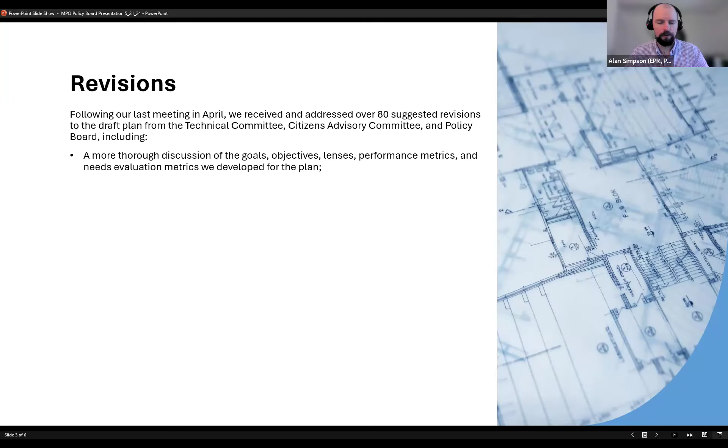I won't go through every single one, but we included a more thorough discussion of the goals, objectives, lenses, the performance metrics, and the needs evaluation metrics we developed for the plan. We made some minor revisions to the constrained and vision lists for improved readability and organization, and we added a few projects to the vision list at the request of Albemarle County staff.

On page 58 of the version in your packets, there was an error in the thresholds for the high, medium, and low need scores. The method we used was a 7-point scale, but the highest score we had in the process was 5.07. So we simplified the scale into 3 categories: high, medium, and low — high being scores from 3 to 5.07, medium being scores from 2 to 2.9, and low being scores from 0 to 1.9. The version you all have in your packet still had the information about the 7-point scale, so that sentence was inaccurate. I had forgotten we'd changed it at some point in the process, so my apologies there, but the language now in the plan is the scale we actually used throughout the process.

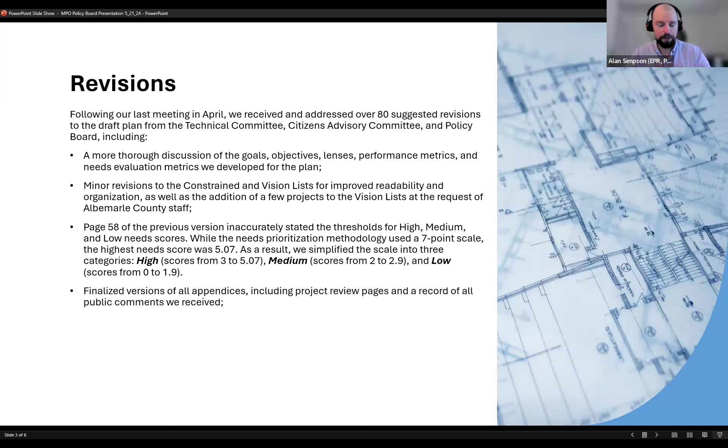We have finalized versions of all the appendices, so we included project review pages for each project — that includes vicinity maps, detailed descriptions of each project, and the breakdown of the needs prioritization score for each project. That's a complement to the constrained list, excuse me, and we have a record of all the public comments we received.

We revised all the maps in the document, so there's new high resolution versions of every single map. I changed the base map to make it easier to read. Most of the symbology was changed just to make it easier to look at, and you can zoom in now and see things in detail.

The previous version had some lower resolution maps, so those should be easier to see now. In most cases, I also included a zoomed in map of Charlottesville, so you can look more closely in detail at conditions in the city. Those are complements to the MPO maps.

High res versions of all the charts and graphs as well, those were all redone for this version. Some updates to the acknowledgement section and some minor grammar and style edits throughout the document. So all told, about 80 revisions to the maps and the content of the document.

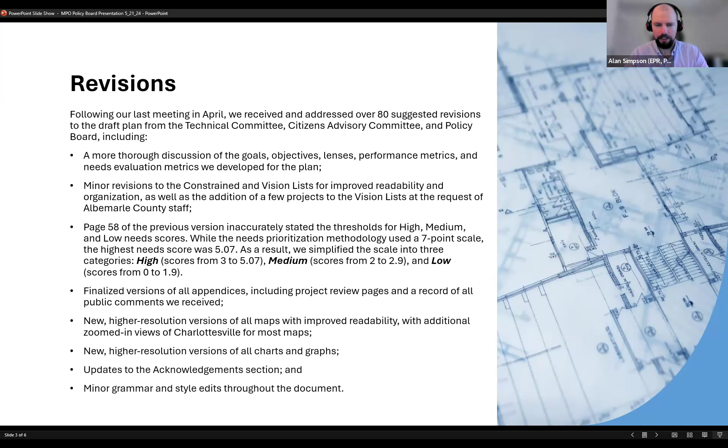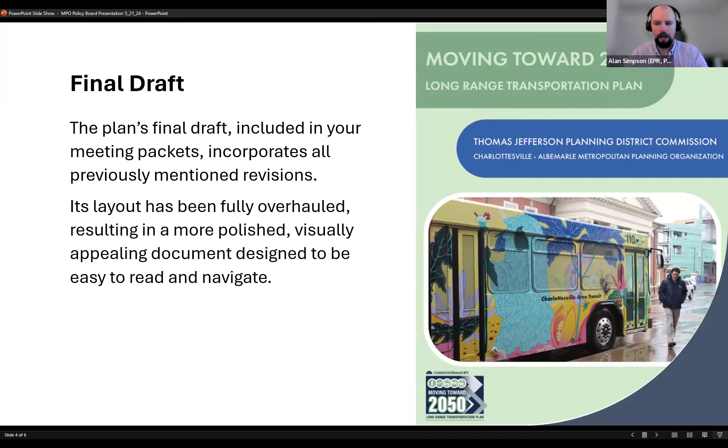The final draft, which you have in your packets, incorporates all those previously mentioned revisions. The layout's been fully overhauled. The previous version was just a Word document, and now it's a more polished, hopefully visually appealing document. It should be easier to read and navigate.

Next steps: the MPO may decide to revise the plan at any time. While it must be adopted this month, there are future opportunities to tweak the document if necessary. Thanks again for all your valuable feedback, your guidance and support throughout this process. You all helped make this a much better plan than the version I sent you last month. We really appreciate it, so if there are any questions, happy to answer those.

I can add that the MPO Tech Committee did recommend that you all adopt the plan as presented. I would imagine, well, I don't imagine, I know, that if Hydraulic comes back and there starts to be traction on doing a major piece, if there's an element not included here, we can revise the plan to include it.

Yes, revisions can be made. All right, if there are no questions, is there a motion to adopt the Moving Toward 2050 long range transportation plan, with the one revision as noted in the change of the scaled score?

I would move the resolution that's in the packet adopting the MPO's 2050 long range transportation plan, Moving Toward 2050, with the asterisk, I guess, of the one revision that Mr. Simpson shared, with the scaled score. It's just an edit that wasn't in the final draft.

The needs we're trying to address with improvements at this location include high crash volumes both on 5th Street and on the eastbound ramp coming off of 64 heading onto 5th Street. There are multiple VTrans needs related to safety, both general safety and pedestrian and bicycle safety, transit connections, and congestion mitigation. Our goals are to address interchange operations and safety, as well as enhance multimodal accessibility.

We've undergone a more recent public engagement process to get feedback on the preferred alternative at this location. This improvement was initially identified as part of a 5th Street corridor study completed a couple years ago with substantive stakeholder engagement, where the DDI was tentatively identified as the preferred solution for this area. This current work is an addendum to that initial study to confirm it would be the preferred solution in developing the application.

This first slide shows the location of crashes and the types of crashes currently being experienced at the interchange. There are a number of rear-end crashes occurring on the eastbound ramp, as well as between the on and off ramps along 5th Street.

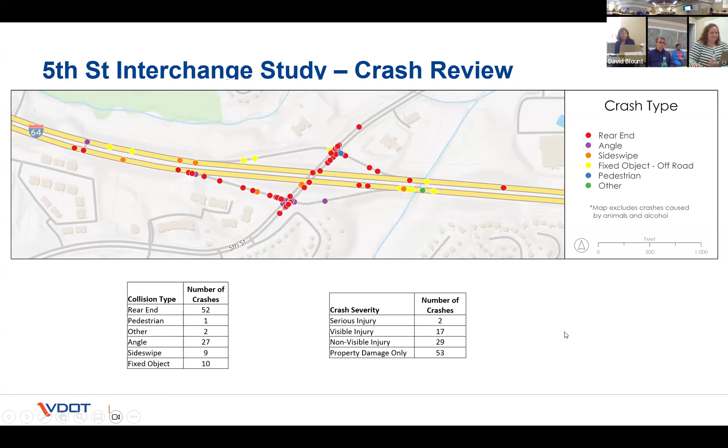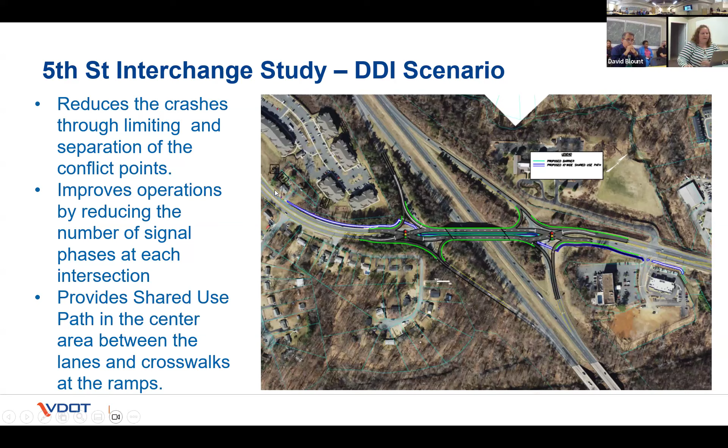And then the crossing would be on the southwest side, also at a signalized crossing. The shared use path would continue to this first driveway area where there's an existing sidewalk. So that was the first alternative that the public was asked to weigh in on.

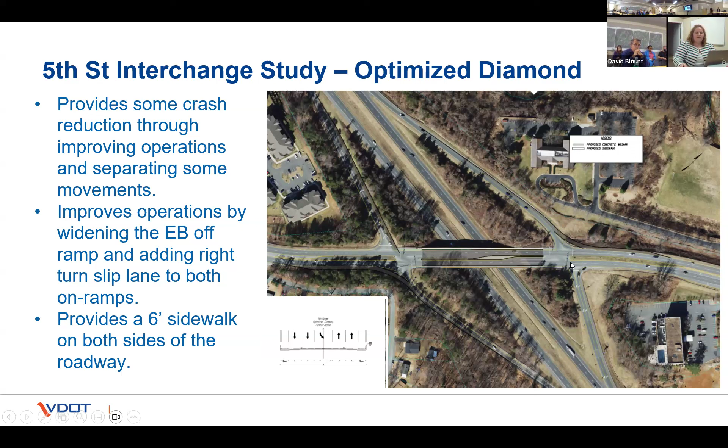The second alternative is an optimized diamond, which would look a lot like what's there right now. The addition would be a right turn slip from 5th Street onto 64 in both directions, an additional eastbound left turn lane, and sidewalks on both sides of the bridge.

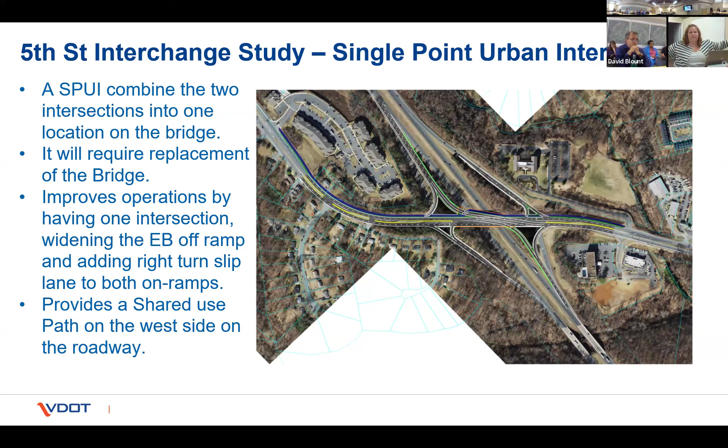The single point urban interchange would basically have a centralized traffic control signal at the midpoint of the intersection that would control the directional movement of all of these, and would provide a shared use path on the west side of the street. The challenge with the single point urban interchange is that you would need a much wider bridge, so if you go back to that first chart, it shows this being very expensive because you would have to rebuild the bridge to accommodate it.

And then the last alternative that was considered is basically the existing diamond as it is now, with the improvement being a sidewalk on the opposite side of the bridge.

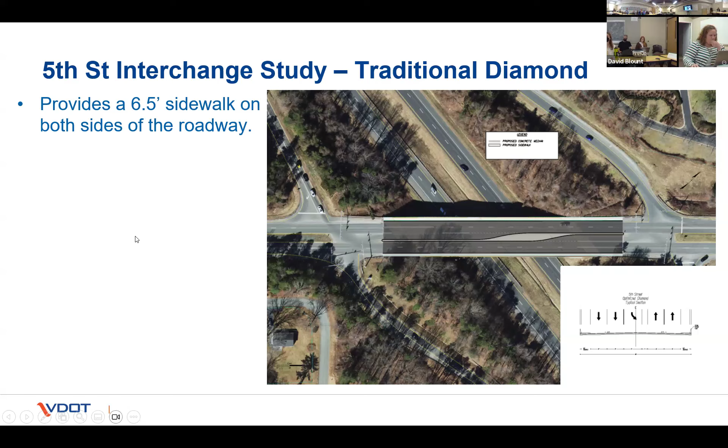So we put this out for public comment and got the comments back on Friday. We did try to do some analysis on the survey responses, but it's pretty limited at this point. Out of all of the alternatives, we had 967 survey respondents overall, and on average, the highest score was for the diverging diamond.

Just curious, is that a lot of respondents for the studies we have, or is that average or low? I would say this seems pretty high. I think we've seen an uptick in the number of responses recently, higher response rates on some of these surveys, but I think we can feel like this has been a well-publicized effort to get people to take the survey.

So there were 967 total survey participants. Of those, 868 provided a score for the diverging diamond interchange, and of those 868, 286 respondents provided comments. So we wanted to understand what kind of comments people had on the DDI in order to understand what the concerns were. But I want to make sure I'm framing this appropriately to say that a very small number of folks who scored the DDI made comments, so the comments are not necessarily reflective of general opinion.

So with all of that said, it seems like there's still public support, as well as the initial assessment looking at the crash modification factors, operational improvements, and cost overall, which would still support the DDI as the preferred alternative for this search. So any questions on this?

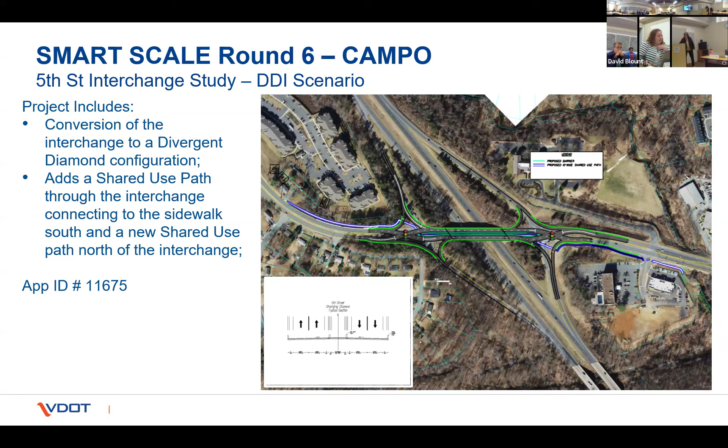Okay, thanks. That was fun.

Just as a reminder for Pantops, it includes the at-grade crossings at Rolkin Road and 250 of Pantops. There would be bicycle or pedestrian crossings on 3 legs of this intersection. It would include a modification of the signal there, and a sidewalk between Rolkin Road and...

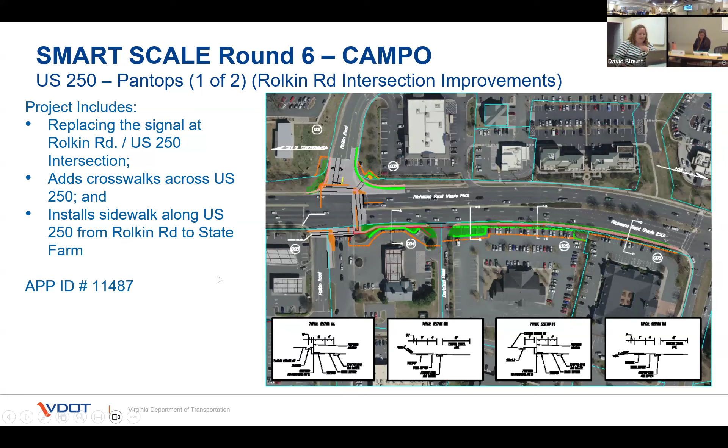It's about 500 feet from the intersection right here, and then a State Farm. And then the next part of this is just a little bit further east.

There would be the median crossing at the hotel, and then an extension of the installation of a left turn lane going from Peter Jefferson Parkway, or going from 250 onto Glenorchy Drive. And then there would be a through cut onto Peter Jefferson Parkway, which would allow traffic coming from Peter Jefferson Parkway to turn right or left, but not go through the intersection straight.

And then there would also be this 50 vehicle park and ride lot with a bus loop, where buses would be able to come to here, drop off or pick up passengers, and then continue through.

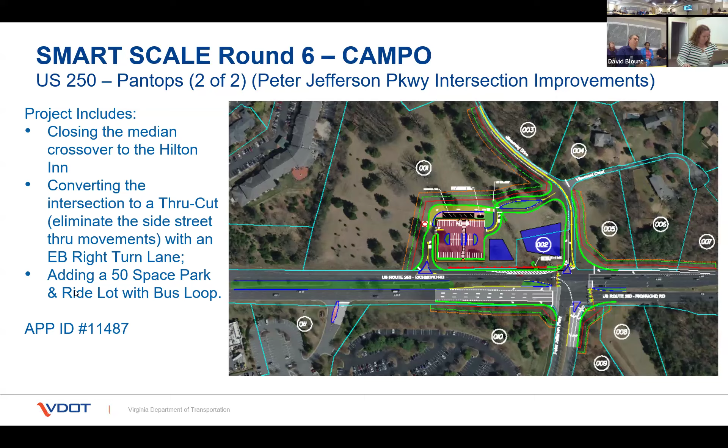There would be some access management improvements, so closing the crossovers, the median crossovers, throughout along the corridor on Barracks Road between Georgetown Road and the interchanges.

There would be concrete pads for 2 transit facilities or transit stops, one at Surrey Road and one on Georgetown Road. The concrete pad at Georgetown Road would be able to accommodate a transit shelter that would be installed separately as part of this application, but it would be designed to accommodate that.

And then there would be a shared use path that is being planned along the west side of Barracks Road through the entire length of the corridor.

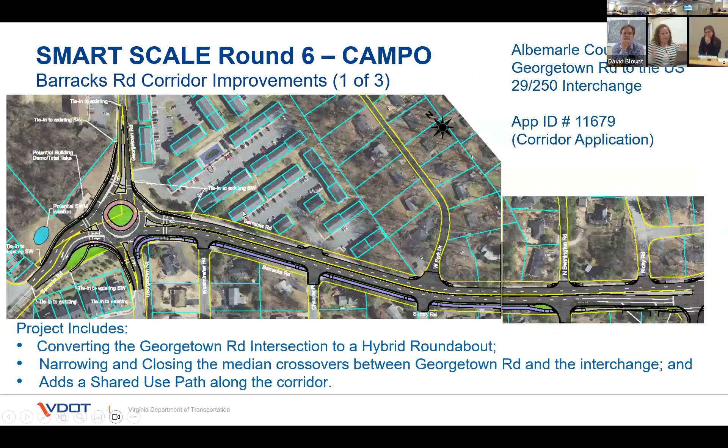And just as a reminder, the first application for the MPO would be for the full corridor, and the second application for the MPO would be basically from the interchange south into the city.

Any questions? Questions? Okay, I think that's it for the Barracks Road project.

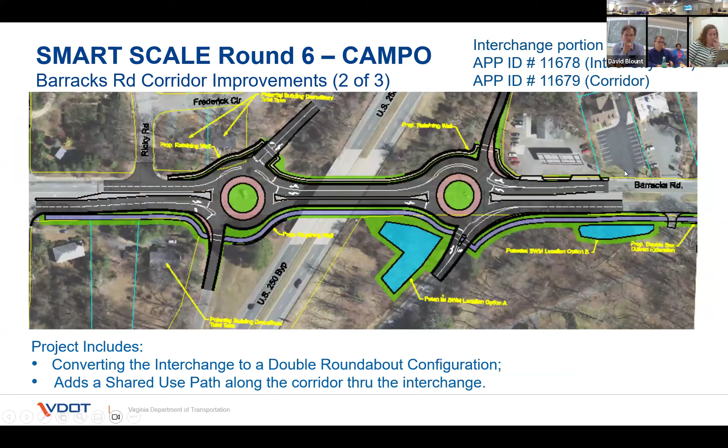I'm sorry, that component is still coming from the MPO, the third piece there. The part right here, yeah, this would be part of the MPO's application. Slides 1, 2, and 3 are all part of it, all part of that full corridor. The second application would basically just be 2 and 3. So it's 2 and 3, with Albemarle submitting slide 1. So the MPO is looking at the full project and the interchange through 29, with Albemarle submitting the Georgetown to the interchange along with that project. All right, thank you.

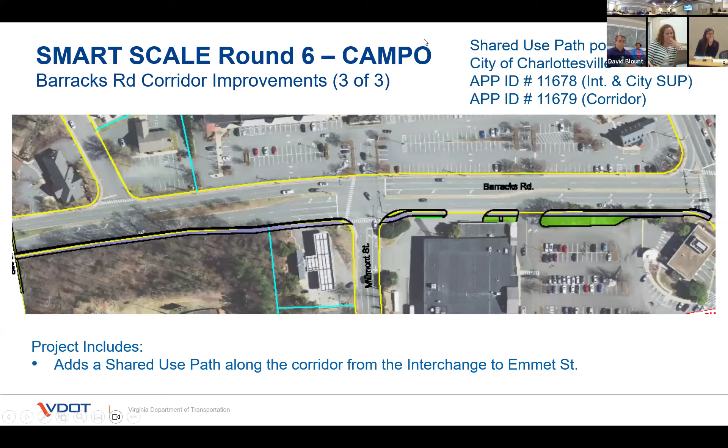All right, any further questions? So we need to take votes to endorse.

Yep, I would first like to share with you the MPO technical committee's feedback, and I'm going to read their motion to make sure I get it correct. There was a motion made in MPO Tech to recommend adoption of the resolution with the added comment that the Barracks Road project should have serious consideration for crossings at Cedars and Surrey in a future design, due to the long distance between the crossings in the current design and the presence of a bus stop at Surrey with a trail at Cedars. That was for this one, so they wanted to make sure that was noted. With that said, they didn't put it as a condition of their recommendation; they just wanted to make sure it was a comment that was shared, that they recommend it with that comment stated.

Could we see that on the map? Is that possible? Can you pop that back up? I can pull it up.

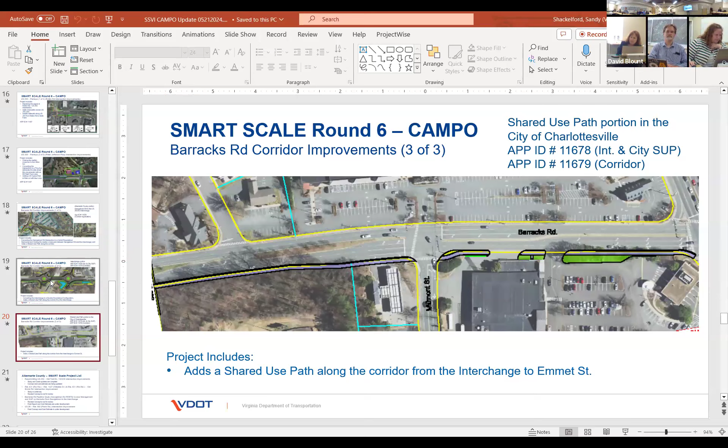Cedars is basically down near where the trail crossing is, the Rivanna Trail, I got it. And Surrey would be right here.

I would be happy to make a motion, Mr. Chair, if you're ready for that. I would move the adoption of the resolution endorsing the CAMPO SMART SCALE applications for round 6, as those were presented, along with the other information just mentioned in terms of recommendations from the MPO Tech committee.

All right, is there a second? That would be a roll call. Supervisor Mallett. Supervisor Galloway, yes? Counselor Pinkston, yes. Counselor Oshman, yeah. Mr. Nelson, I'm abstaining.

Was that both resolutions that could be accommodated in that? No, the next one is if you'd like to see a presentation on Albemarle County's, she has those available, but a requirement for the localities' smart scale applications is that the MPO have a resolution of support for any projects within the urbanized area. So if you'd like further information on those projects, Sandy has it. Otherwise, I have feedback from MPO Tech and a recommended motion for you all. Basically, of course. Yeah. Any further questions about the outcome?